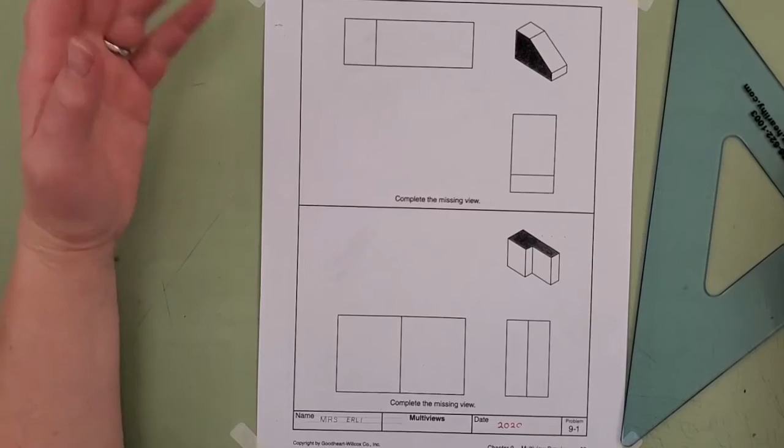So, one of the biggest ways that engineers and designers communicate with each other is through orthographic drawings. We learn how to do some beautiful pictorial drawings in isometric view, and that's used to give a general idea of the shape to someone who doesn't know how to read the orthographic views.

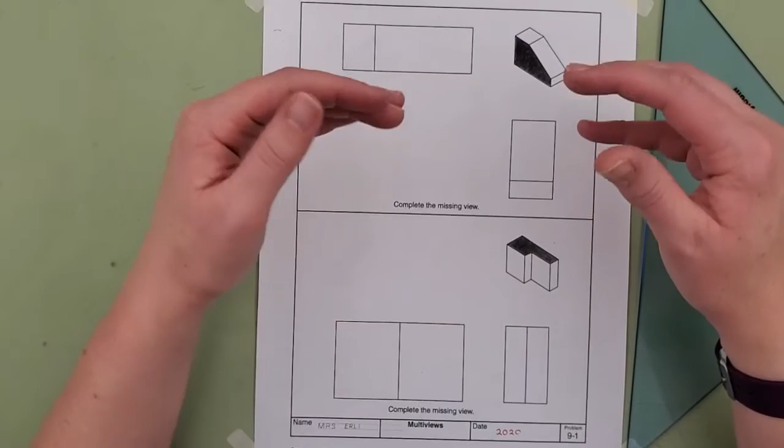But essentially what these are is you take that isometric, that three-dimensional object, and then you turn it in 90-degree rotations to look straight down on the top, straight at the front, straight at the side. Okay, and typically these drawings are made and we add dimensions to them to communicate our design idea to whoever is machining the parts down on the production floor.

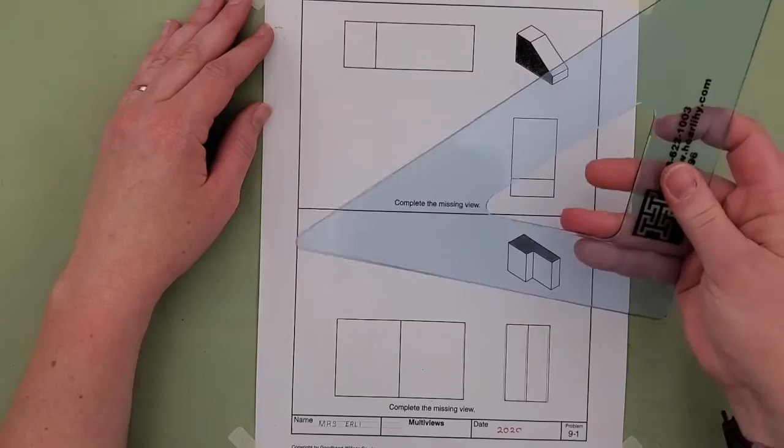So I'm going to be showing you how to do assignment 9-1, and important things to remember: your 45-degree triangle is your best friend for orthographics. You need to make sure you're paying attention to line weight and line type. Okay, so when I taped down my paper, I made sure that I had the horizontal lines lined up with my T-square, and then I taped it down so it wouldn't move.

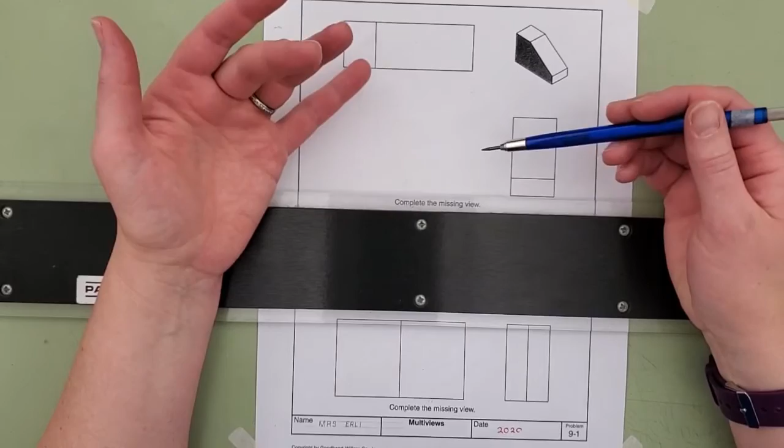With these first several exercises, you're going to be provided with a top view, a side view, and a front view, okay? And you're supposed to be filling in the missing view. Now, one of the things that I want to stress is if you measure accurately on your dimensions for your height, width, and depth on any view, you should be able to translate it to any other type of view that utilizes that same dimension.

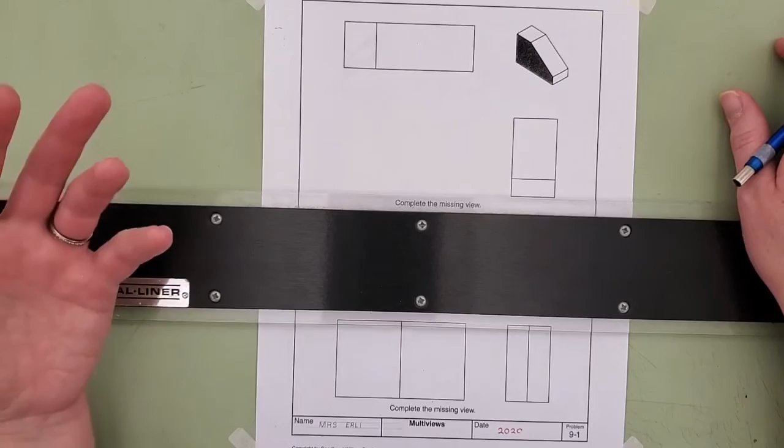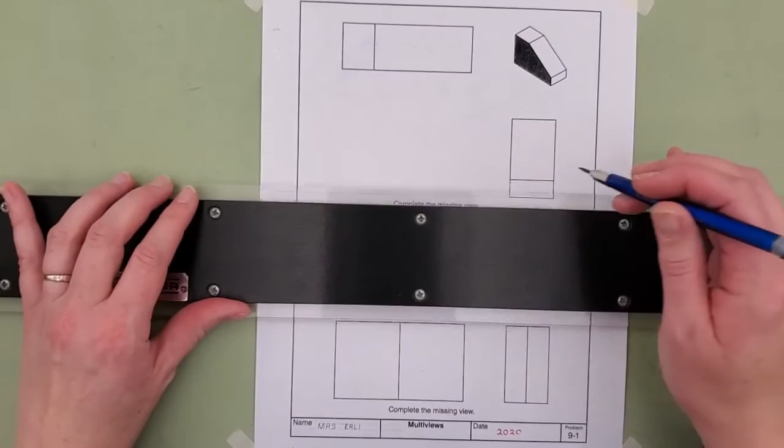So I don't even have my scale out for this assignment. I don't need it because they measured these correctly for me in the first place. So what I'm going to do is I'm going to take my 5H pencil and I am going to very lightly create lines of projection, which is the same thing as construction weight lines. It's the same line weight and it's the same concept. You're just taking the height information and projecting it over to where the front view is going to be.

Okay, you're going to do the same thing with the width information. You're going to drop that down with vertical lines from the top view. Okay, and these are helping you construct the general boundaries of where your object's going to be. Again, they measured carefully on these, so I didn't have to measure anything for that. Just keeping my lines vertical and horizontal.

So now another helpful thing they did on this drawing is they shaded in the view that you are trying to create. Okay, so now I'm going to come back with my H pencil and I'm going to darken in this vertical line from the very top to the very bottom. Okay, it looks like this will be a dark line all the way across the bottom. Looking at this, it goes up that one little distance, so that's going to be a vertical line only until that point. It's going to be horizontal until that point.

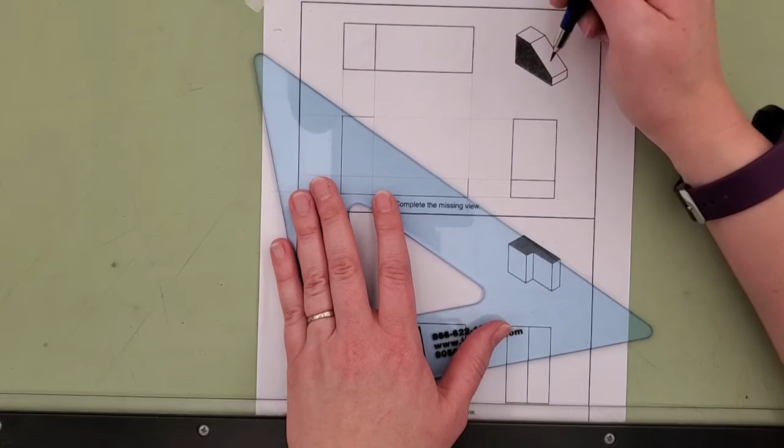Okay, so a lot of us naturally want to use a 45, a 60, a 30, a 90-degree angle to finish up the drawing. But essentially, you can't tell what that angle's going to be unless they tell you. So we're just going to connect one intersection to the other with a dark object line. Okay, and now that front view is what completes this drawing.

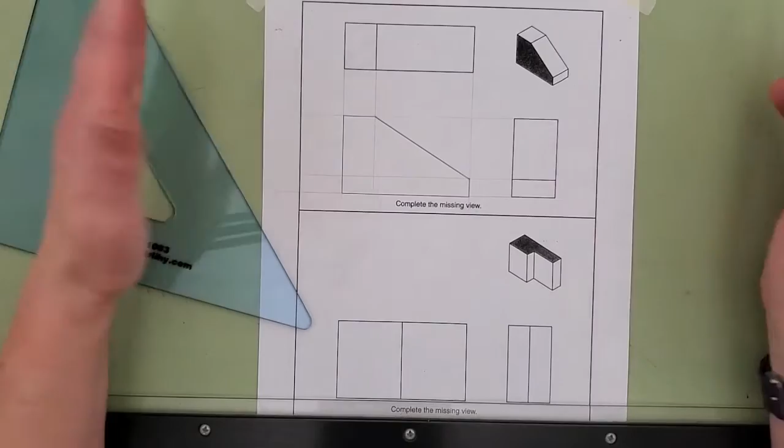There's no other lines that are darkened in, and your construction weight lines should be so light you don't have to erase them. If they're dark though, you're going to want to go through and lighten them up a bit. If you have an end point that doesn't start and stop directly at that intersection, use your eraser shield to clean that up.

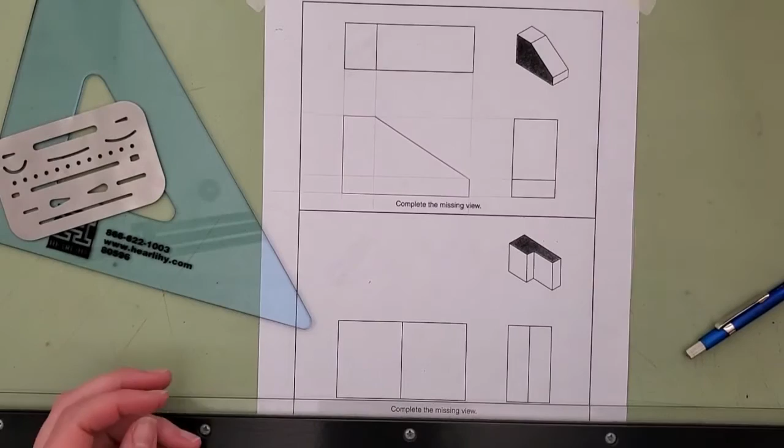This whole course is about neatness and precision, so you want to make sure you have exactly a clean endpoint, starting and stopping right where the intersection is.

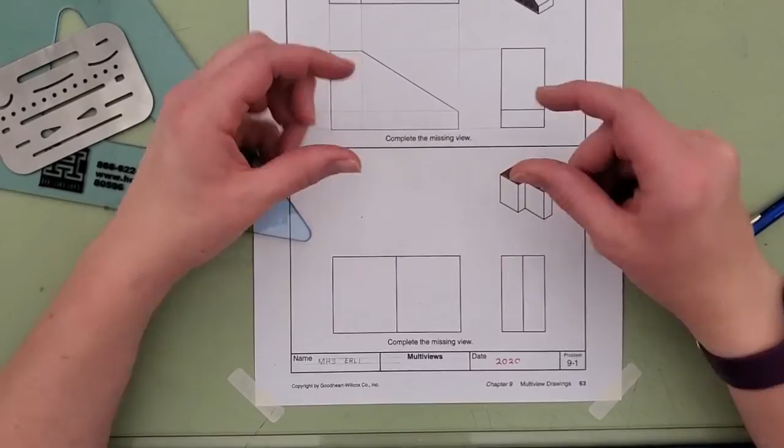On the bottom drawing, I'm going to scoot my camera down just a little bit. There we go. They have given us the front view and the side view, and now we're going to be drawing the top view. The top view goes right on top of the front view. Okay, and it's like we took that block and rotated it just 90 degrees. So you're not going to pivot it or turn it any direction that it doesn't belong.

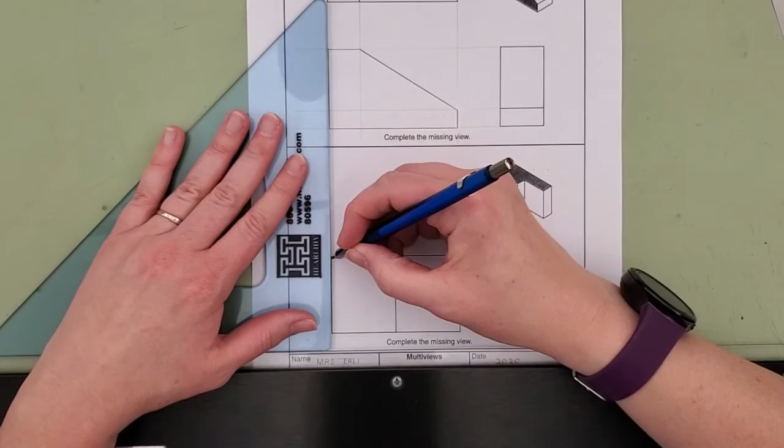Now, the interesting thing is, when you are projecting depth information from a side view to a top view, there is a trick that you can use to keep those dimensions even without ever having to re-measure it. Okay, so I'm going to set this up so I can create my construction lines, projecting all of my width information from my front view to where my top view is.

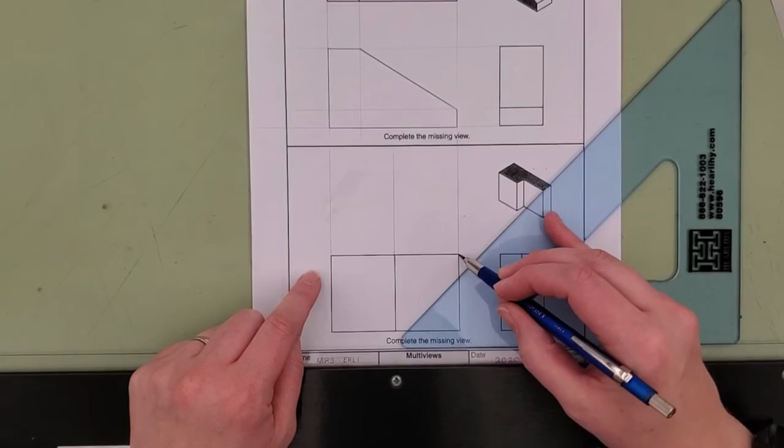Okay. The trick to transferring this stuff over that way is a 45-degree angle. Now, the 45-degree angle comes from the glass box, from the top right corner. This object takes up the entire height, but if I was going to create my 45, it would be from this corner on the glass box for the first exercise, okay?

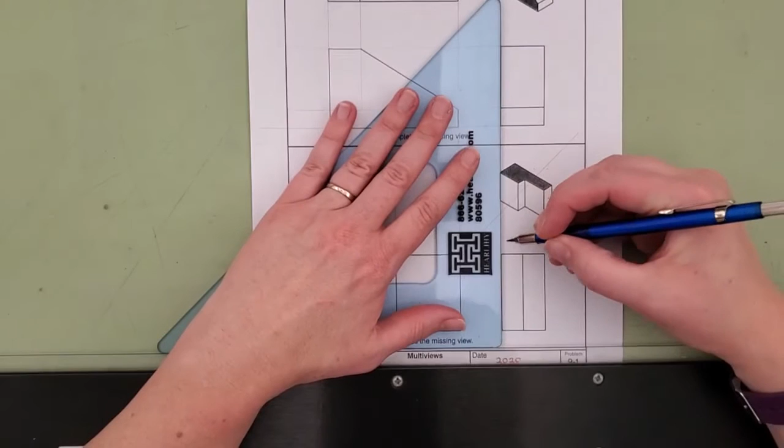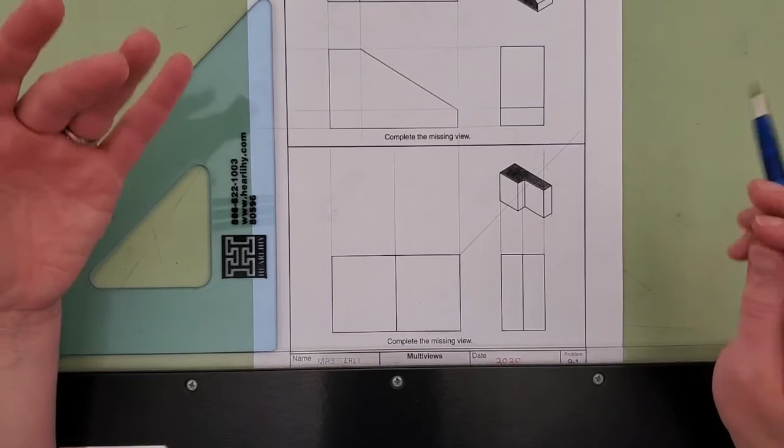By creating that 45-degree angle, it does two important things. It keeps my depth even when I transfer it, and it helps me keep my spacing between my two views the same. It's very important when you're doing orthographics that you have the same amount of space between each of your views. Typically, when we're going to be working on our own projects, it'll be 1 inch or 2.5 centimeters, just trying to keep it even and a nice easy number to remember.

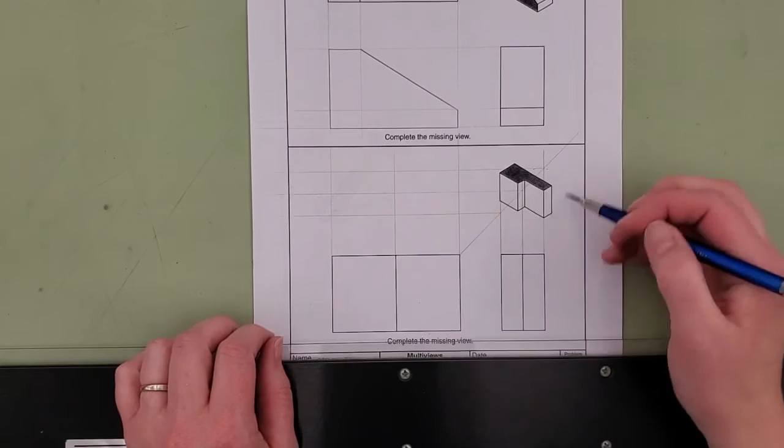So what I did is I created that 45-degree angle. I projected those lines up, and the moment they hit that 45, that's when I am going to project them over. Okay, and it's okay if you draw on this isometric. That's not the part I'm grading. I'm grading your orthographic views. So this is just here to give you an idea, so go ahead and draw through it. I don't care. Okay, so I've given myself all of the lines I need to create the top view.

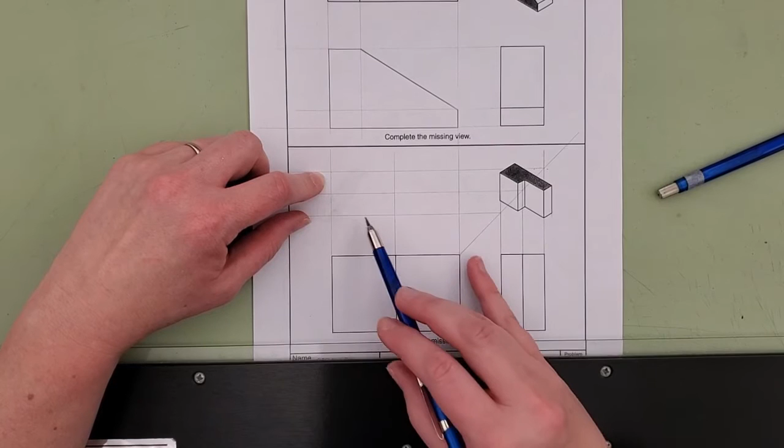Looking at this, it's on the furthest away from me, or all the way to the left of the object. It has a line that goes from the very back of the object to the very front. How do I know which is the back and the front? Well, this is the front view, and this side is closest to the front view, so that's the front. So I am going to darken in, oops, I have to clean that up. That little line. Bring these forward.

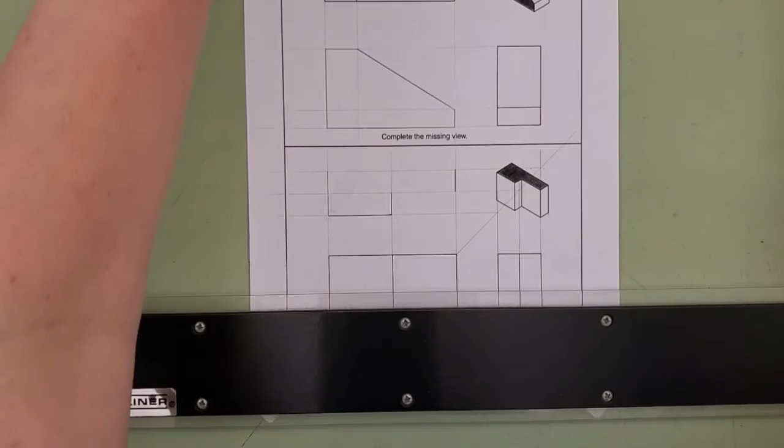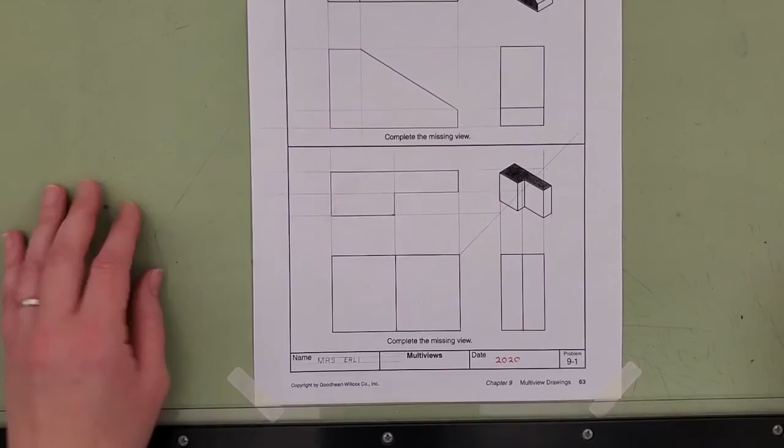Okay, and I have created that shape. So I'll go back and I'll make sure that all of my endpoints are nice and clean. That one hung over just a little bit. Okay, and my eraser shield wiggled, so now I have to go in and clean up that line just a bit. There we go. With these three objects, there is not any hidden information. We're looking at all the views with all the information showing, so we didn't need hidden lines.

Hopefully this is a good start for you. Take the time to create this assignment. Make sure you put your name and the date at the bottom, and then when you're finished, flip the page over for the next lesson.